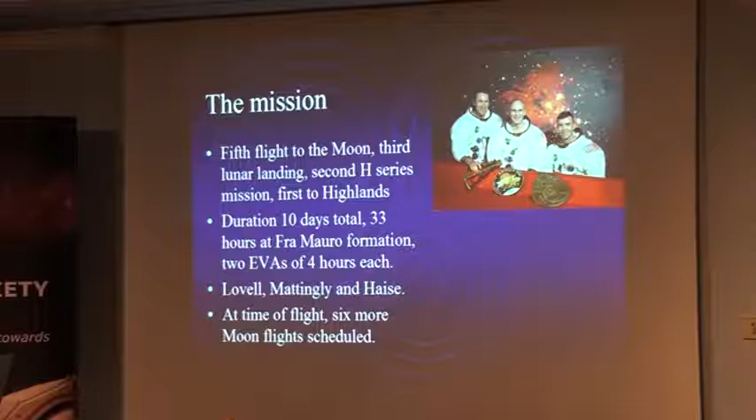The crew was Lovell, Mattingly and Haise, until Mattingly got exposed to rubella - he didn't actually catch it, but he was bumped. At the time of the flight we thought there would be 6 more missions, so this was a progressive step forward. Jack Swigert was moved up from the backup slot to stand in as command module pilot, a very important slot. Nobody ever got to command a mission by being a LEM pilot - you needed to know all of the operations of the whole Apollo system as a command module pilot.

The lunar module pilot really didn't pilot anything, because the commander piloted the lunar module. The lunar module pilot was largely the systems engineer and would do all the instrument readouts so the commander could keep his eyes out front. There was no real head-up display in those days, so readouts would come from the LEM pilot to the right. So the LEM pilot was really a supernumerary - not to demean the position, but this was a very important slot.

So for Jack, this was a tremendous opportunity - straight into a seat that could see him quickly accelerated up to command of a mission, were it to work in his favour. Nobody thought it would, because missions were being cancelled, and so that run-off opportunity was going to be lost.

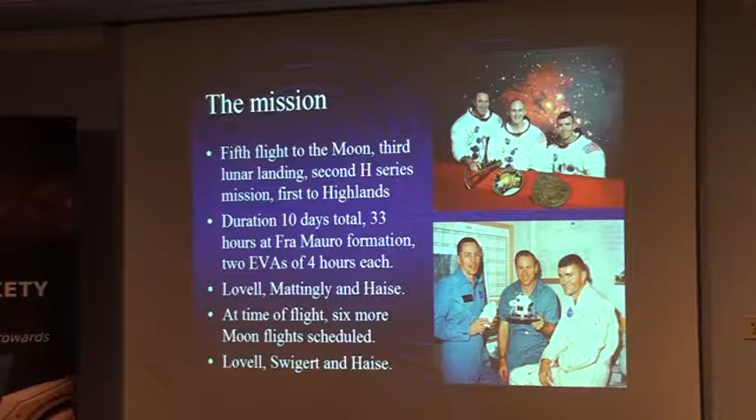This is the thing that never did get recovered - it ended up in the Pacific along with much of Aquarius. That didn't get burned up.

And of course the RTG, the radioisotope thermoelectric generator, and the plutonium-238 dioxide that fueled the ALSEP experiments, were also sadly dumped in the Pacific. The US Navy continues twice a year to do radiation soundings of the location where that cask is, in the depths of the Pacific seafloor, and finds no evidence that there's been any degradation of the cask, as all tests had shown. They're very sensitive to flying nuclear materials off the pad.

You know, rockets have had a history of blowing up. They can disperse materials, so the tests on these casks are very, very intensive, in order to make sure that when you need the power available from a nuclear generator, it's not going to spill its products harmfully - which are incredibly toxic, as you know, in the event of an accident.

Anyway, that nameplate would have been made sometime in April 1970, and it carries Jack Swigert's name there as well. So that's just a nice little token of what never actually did get to the surface.

Pre-flight, okay, we had problems. As I indicated earlier, I'm not going to walk you through every last little detail of the flight - you know the flight very well - but we will visit certain aspects in order, I hope, to correct certain misnomers that come either through the film or through other books that have been written, which generally tend to pick off the high points and miss a lot of the in-depth material.

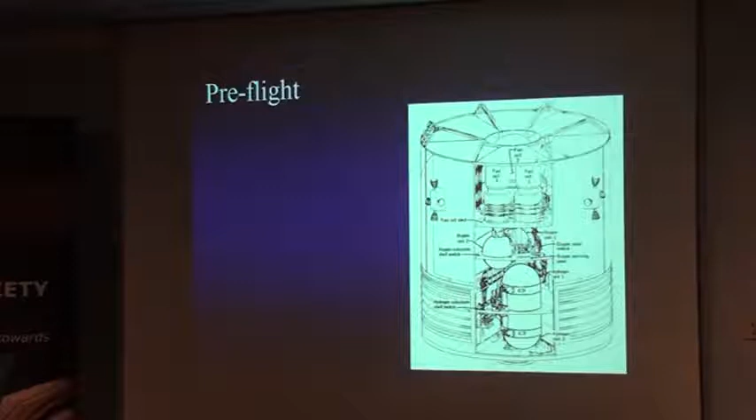So it's a window into what we were working with, thinking how things were done at that time. This is the configuration of the service module, and the major problems we would have would come from the oxygen tanks that are in there - number 2 on the outer position, number 1 internally.

This oxygen tank, number 2, the one that, as you know, cracked - no, it did not explode. Yes, I know the picture on the front of the book, but that's the publicity department at Haynes responsible for that. It did not explode - it cracked and vented the products massively, and cracked the inner tank, number 1 tank, as well. We'll look in more detail at that later. But that's one of those things that really doesn't stand up when you look at the data.

And this tank, like a lot of this hardware, there's been a fast track to get stuff into contract. If you get the chance, get access to the next issue of History Today, a monthly magazine - I've got an article in the issue out later this month, looking at the struggles within NASA to come to terms with a whole new level of engineering that was required in that program.

I refer you to that, where so many of the old guard were moved out in 1963-64 because the Apollo program simply was not happening. We would never have been on the moon in the 1960s had that initial cadre of scientists and engineers persisted and been retained in NASA throughout.

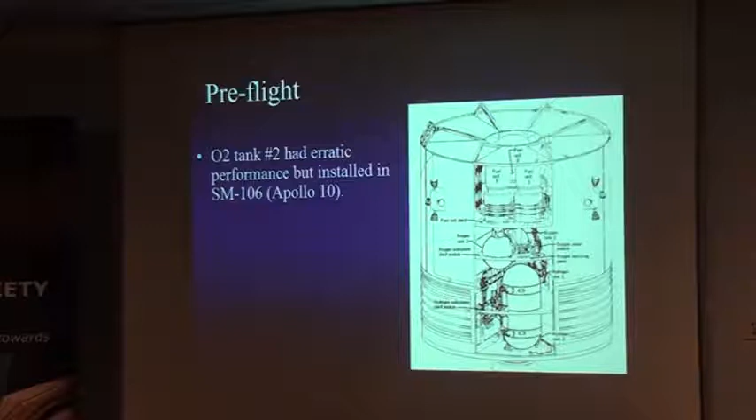The problem was that a lot of this stuff was getting old, was being moved around, and there was an accident that occurred to tank number 2, and still it was used—it was signed off. Waivers were signed in order to get this tank flying, because they didn't want to go back and start up a production contract with Beech Aircraft, who were building the tank for North American Aviation, because that would have been very, very expensive. Yes, we had lots of money in the Apollo program, but not that much, and the budget was going down from about '68, '69.

It was originally installed in Service Module 106, which would have been flown on Apollo 10. That was taken out because at a new level we were learning on the job, as it were, and as you found there were things—oh my God, we didn't put so-and-so in those designs. They really should have them to be safe on the mission. Okay, pull them, upgrade, put them back in, which meant you put them back into another spacecraft that was further down the production pike, so you could slot it in without having to literally strip out a completed vehicle. So this is the way it was handled.

This is not production line stuff. These are Swiss watches, built by individual craftsmen, and their individual names were left on these components in a register to know who had built them by hand. So that was the nature of the business at this time. And it eventually found its way into Service Module 109 for Apollo 13.

Now, one of the big problems was that the test equipment at the Kennedy Space Center, what we call the GSE, the ground support equipment, was wired up—or was upgraded to 65 volts. The spacecraft was wired to handle 28 volts. Suddenly, in 1965, the upgrade to 65 volts was given to the manufacturer, Beech Aircraft, and they never activated that order. They acknowledged they received it, but somewhere in their internal communication, all of the switches for all of the Apollo tanks were made for the much lower voltage.

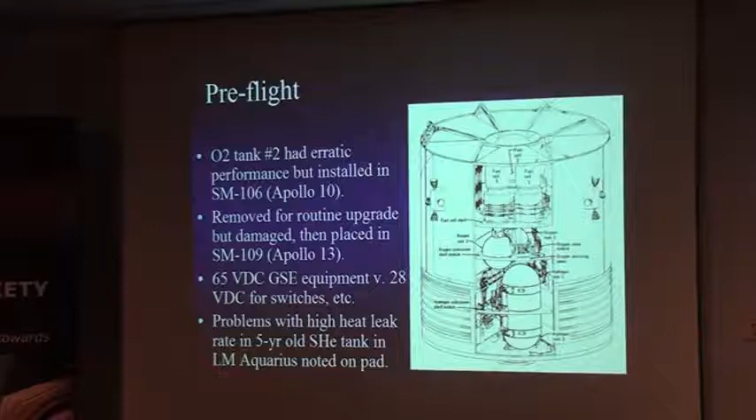That was a lot of the problem. We were running in the face of all of these potential disasters right the way through the whole of the Apollo program. But one of the key factors was that there was so much redundancy built in, and so many rescue contingency plans - that's something we must emphasize as we go through.

So these are the fuel cells on the top shelf. Here are the oxygen tanks, and the hydrogen tank there for mixing in the fuel cells to produce electrical energy - that's how we got electrical energy.

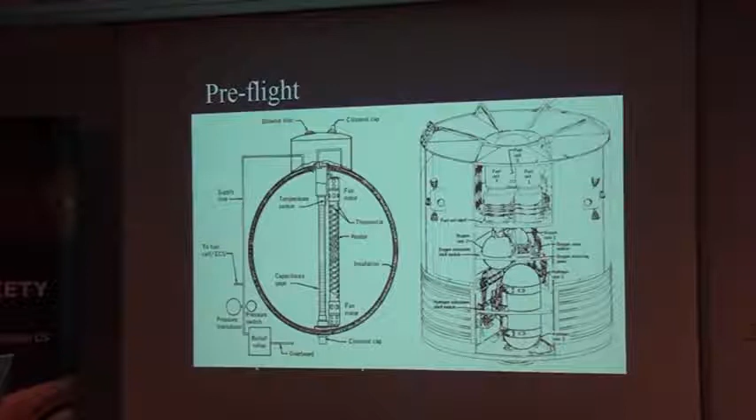But this was the problem: as you deplete the tank and get down low, you want to keep the pressure up by turning more of this slush into a gas, which keeps the pressure and forces it out. It's an expulsion process that does not require a pressurizing diaphragm to be squeezed to push it out, but rather depends on that subtle balance between gas and liquid in the two fluid phases. So basically that's the sensitivity - it's a pretty sensitive balance in the spacecraft to achieve that.

All these drawings are in the book and explained in a walkthrough, but this is just to show the huge complexity of the ground support equipment interfaces, the movement of the oxygen into the environmental control system, and the fuel cell valve module, which then takes the oxygen.

The hydrogen side of the feed is not shown here, but this provides the balance between the oxygen that's needed by the environmental control system and the oxygen needed for the fuel cells to produce electrical power. There's a valve demand system which allows you to regulate the flow and the amount going through the various systems.

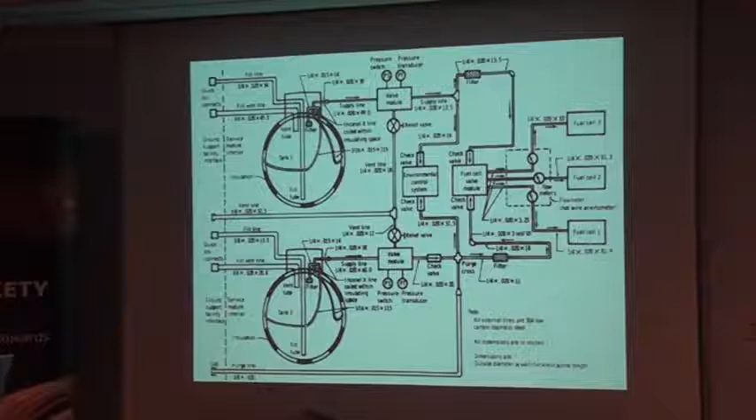Ascent problems - those are the problems we had before the flight. The supercritical helium was known to be rising in temperature, and it would pressurize to the point where it would rupture the blowout disk on the supercritical helium tank. But it would be on the moon and have used the descent propulsion system before the line reached the point where the tank would blow.

So we were launching with a tank that was in fact doing something it should not, but extrapolating forward, plotting out how the temperature would turn the supercritical helium to a liquid and overpressurize the tank, and then waste it through the blowout disk, which would make it impossible to use the descent propulsion system. That was just one of the normal things in Apollo - that's how you balanced and kept things going.

So this was a whole new way of flying missions compared to even Mercury and Gemini. A lot of that overriding confidence spilled into the shuttle, because the new management structures, which were turning their back on the old ways, were already in place during the execution of Apollo missions and the development of follow-on systems such as the shuttle. Remember, the shuttle was paid up and signed for 3 years before we stopped flying to the moon - it dates right back to '69, a year before Apollo 13, when the shuttle became the formal approved program by the White House.

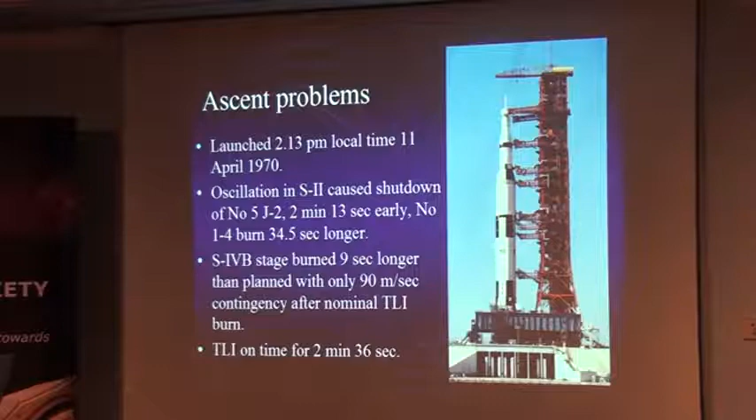TLI on time for 2 minutes 36 seconds.

This is the kind of trajectory—a chart I've used from the operational trajectory manual of Apollo 12. It shows that launching to the moon on a free return trajectory would bring you back like so, and once you get to the point where you can extract the lunar module, you have a backup propulsion system in the engine meant to land you there—a secondary to the primary Apollo main engine that can get you back onto a free return, because the sites we wanted to reach could only be achieved on what we call the non-free return.

A non-free return throws you around the moon and brings you out like this, and you'll spend a very long time before you get back, and you won't be in a talkable condition by the time the spacecraft spirals down to Earth—so you're going to lose the mission if you don't handle it right.

But this is part of the redundancy that was built in. You launched onto a free return, but then had to use the spacecraft's engine, after it extracted the lunar module, to get onto this non-free return path, which had a lot of redundancy built in terms of the actual options you had.

We had abort lines planned all the way through—plans for aborting at each 5 or 6 hour segment. It was balancing all of those with the situation we had at 55 hours 55 minutes, the crisis in Apollo 13. That was the real bugaboo, really, that challenged everybody to make the right decisions.

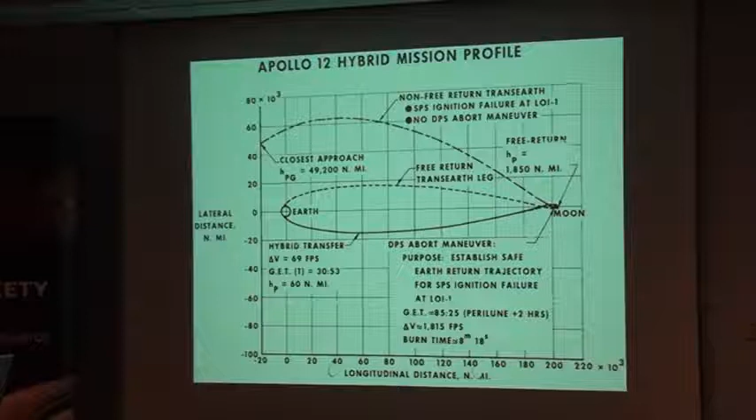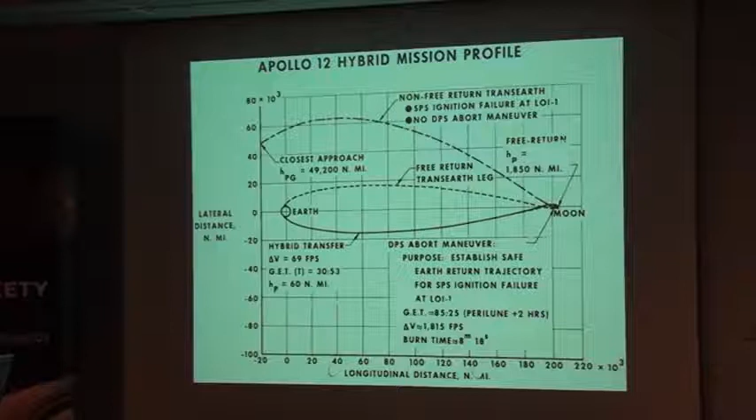It was not 'my God, what do we do?' Nobody said that. There were so many options—which do we choose? They'd rehearsed so much, and more about how, in fact, these aborts had been built into the very engineering of the spacecraft itself. We'll talk about that a little later.

So the connection—this is the axial orientation of the forward-facing seats of the command module, docking, of course with no people in there, with the ascent stage of the lunar module. Once you've connected like so, the extraction took place, and then the standard movement pioneered by Apollo 12 takes you from a free return to a non-free return.

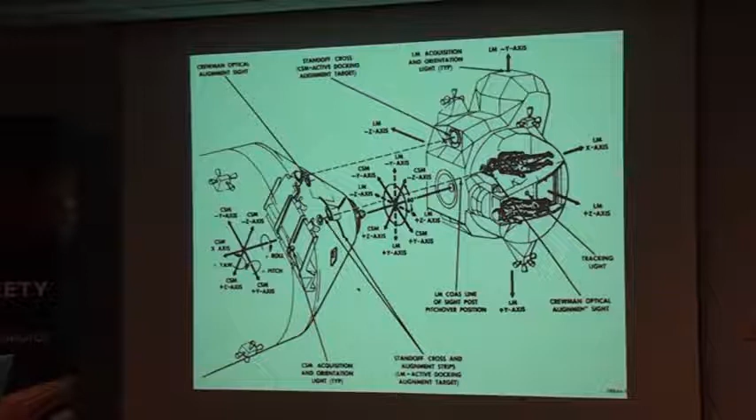This means you've got to fire your engine, else you're not going to come back to Earth—you're going to go spinning off way around to a very different place in the solar system. A long mission, but longer than the consumables could support life for, definitely.

The loss of O2 tank 2 - moving forward, I'm not going to go through all the details of the flight. But looking back at this chart once again, just for orientation: oxygen tank 2 is on the outside, tank 1 on the inside, and the 2 hydrogen tanks.

It looks as though it's tank 1, tank 2, which are spherical tanks. All of the data, as you might imagine, is in the book. These are sleeves which give it the appearance of an elliptical tank, or a cylinder with hemispherical end domes. In fact, they are completely spherical tanks, like the oxygen tanks you see there.

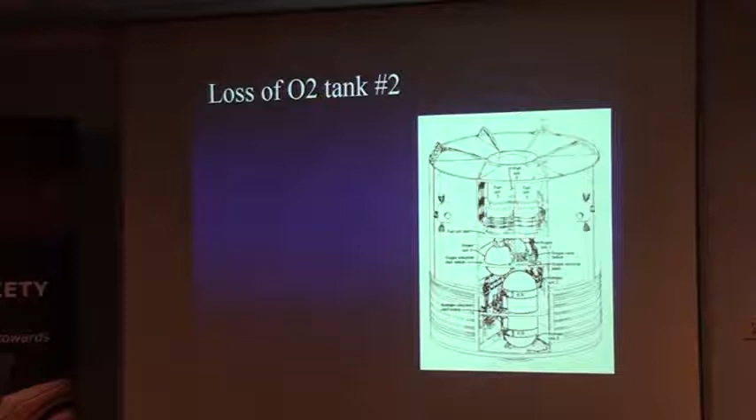So all of the gubbins connecting it all up is controlled via the systems in the command module. The loss of tank 2 occurred - that's tank 2 there. This is a view showing inside, part of the closeout pictures, used in the review board analysis of what went on.

Just to show you the general structure, that bay's taller than a human being, so it's quite a tall structure. This is looking from that side on, and this is tank 2 here.

A lot of material, and it's a very cramped, tight space. You can put your hand round the back of these tanks, but you can very easily get it jammed behind there. There's a lot of very delicate stuff around the back in terms of pipes and tubing. There's not a lot of spare volume, so any pressurization of these bays will build up sufficient pressure to whack that door straight off.

And that panel which covered there was configured so you could service the shelves, as they're called, in the bays - the 2 shelves - and then it was bolted on. So that was that. These are the fuel cells right at the top.

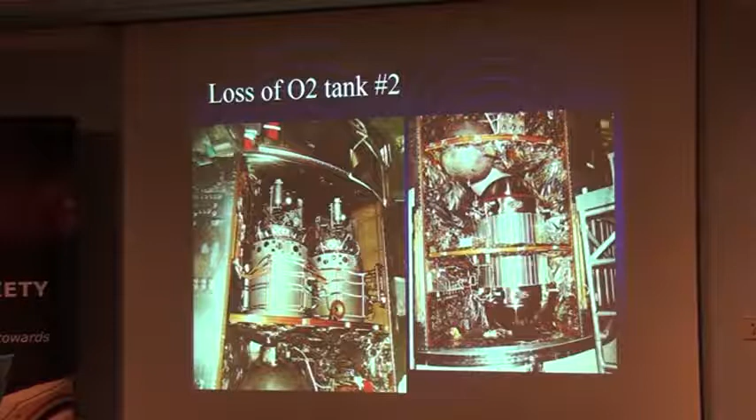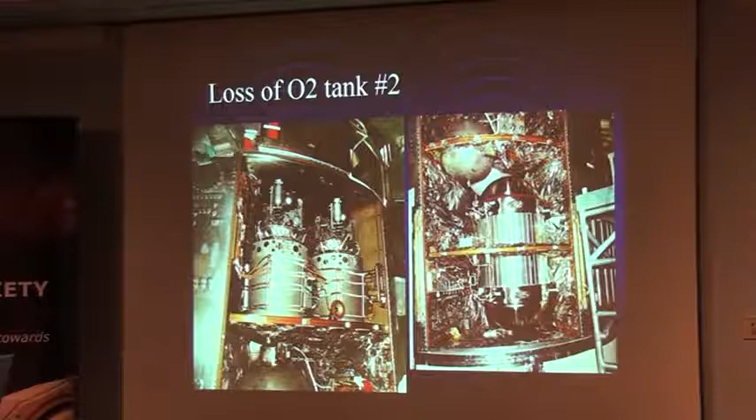Across the top are the radiators for the electrical production system, so the heat taken away by the water glycol solution is removing heat from the mechanical operation of the fuel cells themselves. They're producing a lot of heat, and that's taken away and radiated to space by the radiators there. Big radiator panels on the side of the spacecraft were for removing heat from elsewhere.

During this time, over in the mission evaluation room, this material would usually come through about half an hour to an hour after. So all of this stuff was feeding across and being carried over. There was another room, pretty empty during most missions, room 210, up the hall and along the corridor. But the MER room was slightly askew to the MOCR, the Mission Operations Control Room, and there was a data transfer path from the MOCR into the MER.

And the MER was the interesting place to be. They were mad as hatters in there - it was chaos, bordering on anarchy, because there was such a massive build-up of brain power in that room that I swear it wasn't coffee cup steam, it was coming out their ears during this mission.

There was tremendous excitement building all the way through, and it's difficult unless you were there, unless you imagine yourself into situations of great danger to human life. But you know you can solve this, and it's an extraordinarily fascinating and acceptable challenge. You love it because it challenges you to reach beyond your grasp - Browning said that, and that's what it was all about.

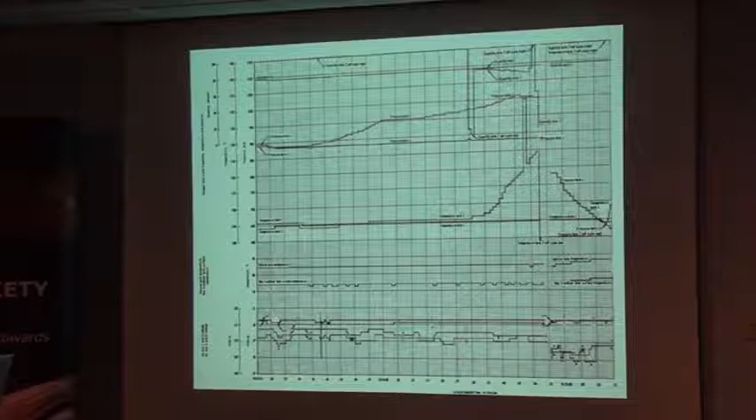The brightness of the reflectance of some of the particles that were venting was greater than the brightness factor of the stars that were crucial for alignment, so you had to go to backup systems for that. But these were the traces as they appeared on the displays initially, in the MER and room 210.

Now this is a room which I always used to love to go to. This is the SPAN — now this is not the span that is the analysis section, but this is the solar particle alert network. And one of the things that was very interesting, and I found particularly fascinating to keep an eye on, is the fact that...

...we thought, oh my God, if we're going to get into the lunar module to use this as a lifeboat and use its systems and shut down the whole of Odyssey, then what you're going to have is the crew in a very, very light-skinned vehicle, and the potential for radiation harm from any of the solar bursts or flares. Aquarius had very thin walls, and this was the room where all of that information from those standoff Pioneer series spacecraft came in, in order to get measurements directly of the energetic particles coming from the sun, and that was an important part.

There was a very intense concern that it could be a very serious health hazard. Radiation has come up recently.

I meant to put a chart on this and I haven't—it's in the current issue of Spaceflight, where I'm trying to lay another of these myths, about going through the radiation belts. They didn't fly through the radiation belts in Apollo. They flew up over, because the moon is not in the ecliptic, it's angled up. So to get to the moon, you fly over and you're very rapidly out.

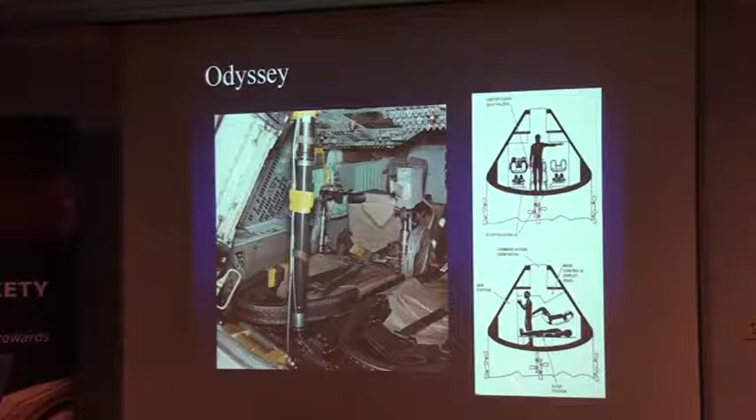Getting in, when you look in an Apollo Command Module, it looks as though the floor is just under there, but there's a tremendous space where you can float and get underneath, so you're suspended quite high up against the control and display panels. All down the left-hand side is the environmental control system, and beyond that, underneath the tunnel area to the far wall, is the guidance and navigation station, with the service module underneath, just to remind on the configuration. That's looking across.

This is another of the closeout pictures, which shows the entry hatch, oodles of space underneath, and the infinitely variable articulation of the seats. Because the maximum G loads are about 4.5 to 7 G, you did not need the form-fitting moulded couches that were needed for the Mercury ballistic shots, and were retained for the orbital shots, and are also used in Soyuz, where there's a very great need for that, largely on landing as well.

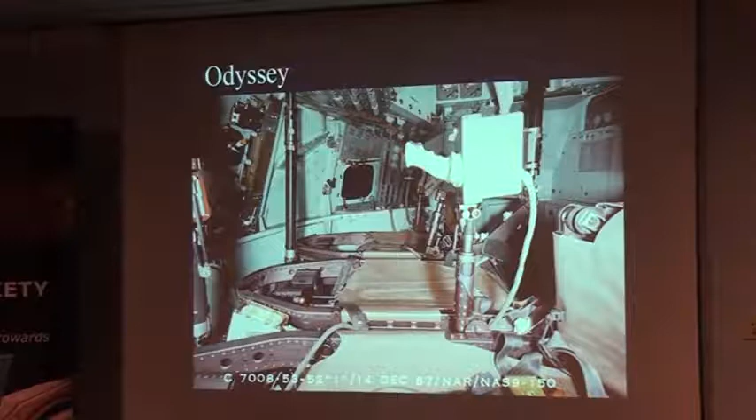But this area became the freezer. It became, because the temperatures were going down so low, the sleep area, which was not particularly effective. The service module itself, in terms of the propulsion system - these are the sectors which contain the 4 propellant

tanks inside there for the service propulsion system. The engine intrudes up to a position about there, and the center section contains the helium pressurization. There's the fuel cells there. This sector, 1 of the separate 6 pie-shaped sectors, would be used in the J-series missions for the scientific instrument module, the SIM Bay, for all of the scanning of the lunar surface from instruments and cameras.

But the concern was we could not use the service propulsion system, not only because it's often said we didn't know if it was damaged. It wasn't that reason at all.

The electrical power - this is another way you look at options. If we'd powered up the spacecraft, you'd have been powering up to 45 to 60 amp hours in order to be able to fire that engine, because it required that amount of electrical power to bring all the circuits on. And it had a lot of electrical redundancy in it, so you needed a lot of systems ganged up with a guidance platform as well.

But the real reason was just to contain as much of the electrical power, because any time anything was powered up in the command module, it came from the lunar module. It did not come from the command module batteries after a certain point - very early on, the most frightening point was when they had to switch on one of the 3 command module batteries, draining away, which only has about 40 amp hours on it, and there are only 3 of those to last the 2 hours down into splashdown. And as tank 1 was draining away, they were running out of options, and it normally takes several

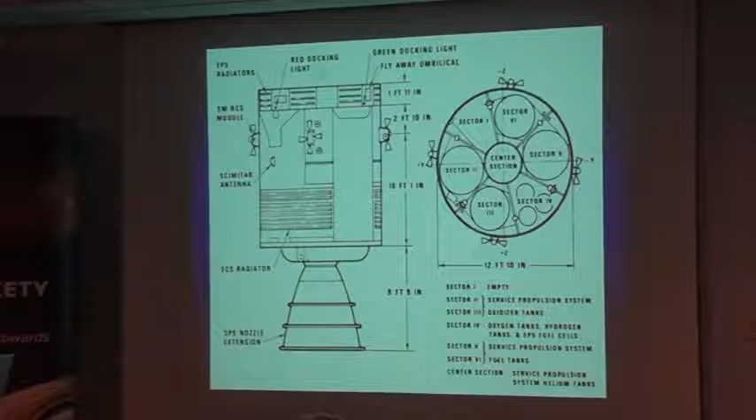hours to power up the lunar module. They did it in very fast time, using workaround procedures that had been developed in the MER on a request from Room 210, that would be one of the major areas of focus initially - get down the power usage, and we'll look at how that was important in just a moment.

So this is the service propulsion system there. It would simply have taken too much power. There was also the consideration it could have been damaged, and a damaged engine bell can play haywire with your velocity vectors, and that's absolutely crucial, particularly when you're trying to get back onto a free return course.

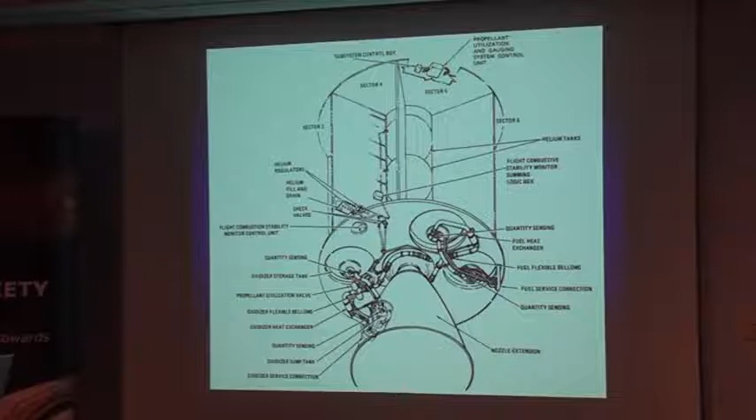So here we were on a non-free return course. Command and service modules are essentially dead. We've got the lunar module occupied now as a lifeboat with its thin walls, and the crew are exposed to any particle alert network concerns that might arise, and only the propulsion systems available on that, because that had about half the electrical power required, simply because there were only 6 400 amp hour batteries, 4 in the descent stage, 2 in the ascent stage, and so it was very quickly becoming a power balance budget, with knock-on consequences for all the other consumables as well, as we'll look at in just a moment.

All these contingency plots were in the spacecraft and in the flight data file, the FDF — volumes of books on the systems and the various. Most of the panels had a lot of words and numbers, all the verbs and nouns for operating the Apollo guidance computer, written on the boards and shelves and the thin wall cupboard doors, if you will, of the container section.

So there was a lot of reference to remind the crew what was required at various times, and this information was carried aboard, because if you lost communication with Earth, you'd need to generate this information directly on board and fly the vehicle back. Draper Labs, who did most of the G&N stuff, prided themselves on being able to cheat the system and get greater, more accurate navigation than Houston could provide, simply by the crew doing celestial navigation using the tools on board with the G&N system.

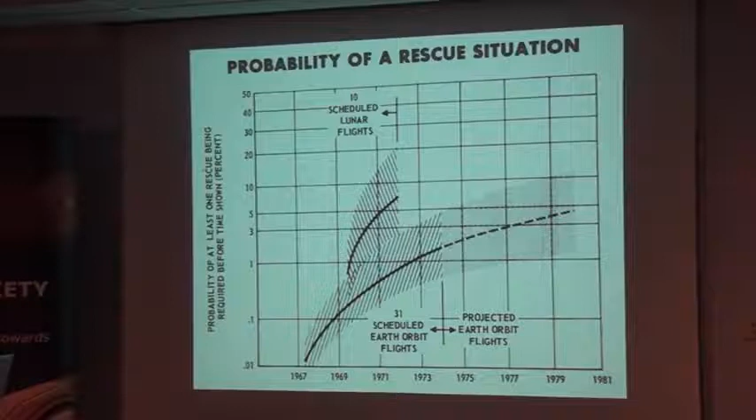Okay, but that's just to show you the kind of thinking at the time, and these were internal planning documents where, yes, these were expected. I'm making a joke of it, but this is pretty standard stuff.

Aquarius, of course, familiar to all of you I think — ascent stage, descent stage with propellant tanks for the ascent, and all of the electronics on the rear end of the vehicle, with the propellant tanks, the rendezvous radar, the S-band communications antenna, and a light structure. A lot of very unkind things have been said about the lunar module, that you could kick it with your foot and go straight through.

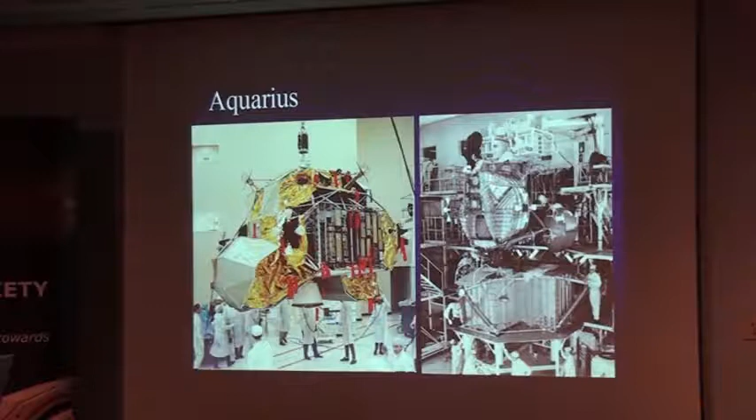That's another view of the rear. That's the lunar module. Pilots say it behaves like a real sports car when it's devoid of the descent stage, but essentially this was the vehicle with its systems - 4 batteries in the descent stage, 2 in the ascent stage, and this is the configuration. These are VHF antennas on the back there, and that's the structural shell.

There's lots of drawings like this in the book. There's an appendix in the back, one on the command and service modules, one on the lunar module, so it brings that right up.

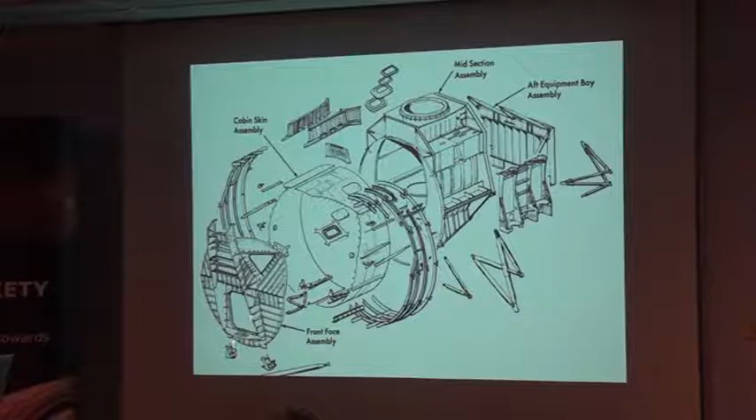This pressure shell in here has two steps. You step down into the circular section - that's the section connected with the command module, so you float down there, and immediately what is up in the command module is down in the lunar module, because they're docked like so. The ascent engine is in there, so you sashay down into the lunar module, forward to the front face assembly with the hatch and the two triangular windows.

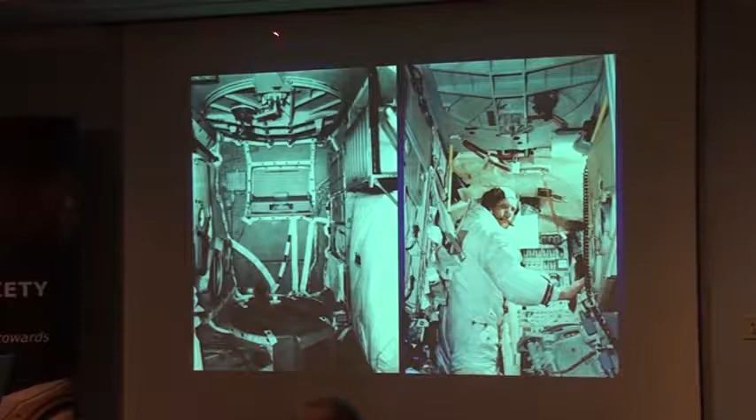This is a picture from Apollo 11, showing Neil Armstrong on the ground, not in flight, to give you a view looking forward from the position that's really sitting on the ascent engine cover, with the hatch at the top, to give you an idea of the space in the lunar module, with all the environmental control stuff on the side. This is looking back from Neil's position, or forward, with the ascent engine cover there, the PLSS - the personal life support system - recharging equipment back here, and the hatch you see there, up into, in the case of Apollo 13, Odyssey.

This is a fisheye lens view which just shows the general layout. What's missing there is the DSKY panel for the lunar module guidance computer, and here you've got the circuit breaker panels either side, and that's the hatch you would hopefully go out to on the lunar surface. Also, 8 balls here, the flight director attitude indicators slaved in with the guidance and navigation system.

So this became the engine room for Apollo 13, where it should have been the front porch of the taxi going down to the lunar surface. So, a very important job to play.

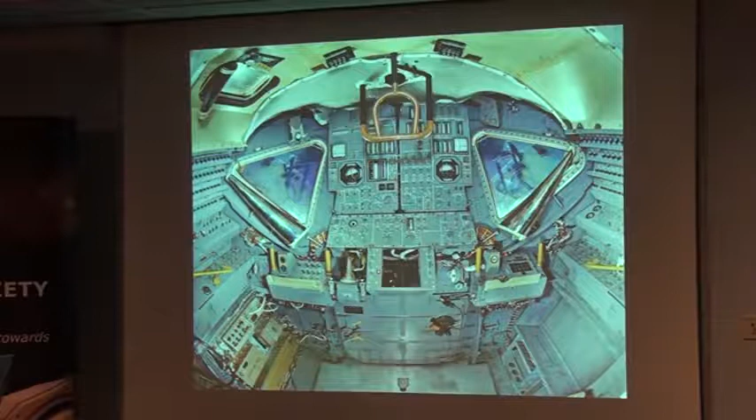LEM propulsion, of course - the ascent propulsion system was unavailable because the lunar module had most of the consumables. Two-thirds of the consumables were in the descent stage section, largely because it was only meant to be used during ascent and rendezvous. There was proportionately greater consumables in the ascent stage than in the command module for the Apollo CSM, because potentially you could be stranded in orbit and wait a day or so before the command and service module came down to rescue you, if that was possible.

Once you were barreling down the re-entry corridor into Earth, you were going to come into Earth's atmosphere anyway, so you had no option. You could just have a couple of hours of life support in the command module after you'd separated the service module.

But it's important to point out there was a point, which I'll mention shortly, where we went on to LEM ascent stage consumables, which was a great relief in case something terrible happened again in the descent stage, because we had to jettison that. There was a point in the mission where we breathed a further sigh of relief on the way back, where we could survive the crew on just the ascent stage alone.

The DPS provides essentially 44.4 kilonewtons of thrust, nominally 10,000 pounds, throttleable between 11 and 65%, or between 92 and 100% - you didn't want to go between those two, very unstable, it would shake itself to pieces and the engine would become very aggressive indeed. So there were those thrust bands, and we had a proportionality option with regard to the thrust that was available.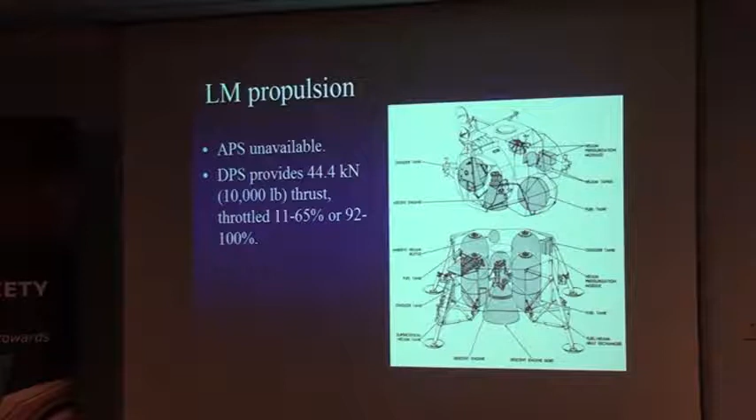So using the dips early on was good to get back onto a free return trajectory. That used the ambient, and then when you fired again to speed up the burn two hours after passing around the moon, that used a little more of the supercritical helium, but still didn't use enough to completely vent it out, and we'll see the consequences of that.

The delta V available in the lunar module is reduced because of the greater mass. In big numbers, about two-thirds of the mass of the whole docked configuration was in the command and service modules. And remember, we'd only used the service propulsion system engine once, just to go off the free return onto a non-free return.

Just a few seconds burn, just to make sure it would work. You always want to do one of those mid-course corrections with the SPS to verify you'd blipped it on and off fine, everything, start up, shut down, any transients understood, so it would be cleared and the MER would look at the trace. Yeah, that's okay flight, we can use that. Okay, that would fit in, that's another tick. Use the SPS for lunar orbit insertion.

There were all these different gates that were occurring. And I wish we'd done more of this talking to the public about what was happening, because so much was going on that was intensely fascinating.

Rocket science really is common sense, and I mean that in a very serious way. We need to feed this stuff into our education more, and I know the BIS is doing that with its education programs as well. But there's a very strong need to give practical applications, to run missions, show them how all this worked, to get the kids playing with these things on their computers, and it's great.

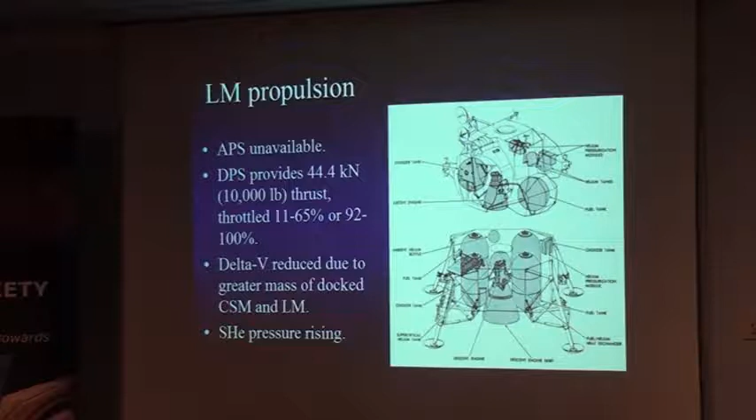Supercritical helium pressure was rising, we've talked about that. Okay, consumables.

Now this is a factor which is quite important. The oxygen was in abundance. We had more than twice as much oxygen as needed. Why? Because on a normal profile, I put this chart up to show that on a normal mission...

...the 33, 35, 40 hours you had the lunar module powered up, you'd have to incorporate this use rate, but it drops because that's when you vent in order to go out for your spacewalks. You dump all of the oxygen that's in the cabin. Well, we didn't on Aquarius, so we just kept that line going, so it would last very, very much longer. And that's the facet.

And in fact there were three, because on Apollo 13 they were going to open the door a third time and throw out unnecessary things in order to take in more rocks from the surface. So there was all of that. This is all part of the geometrical ballet that went on - if you don't need to bring things back, throw it out the door.

Very American way, lighten the load, and then you've got additional margin. What the heck if you don't need it on ascent? It reserves your options for rescue rendezvous if you need to do your bit, if you've been landed in the wrong trajectory for orbiting or rendezvous with the command and service modules.

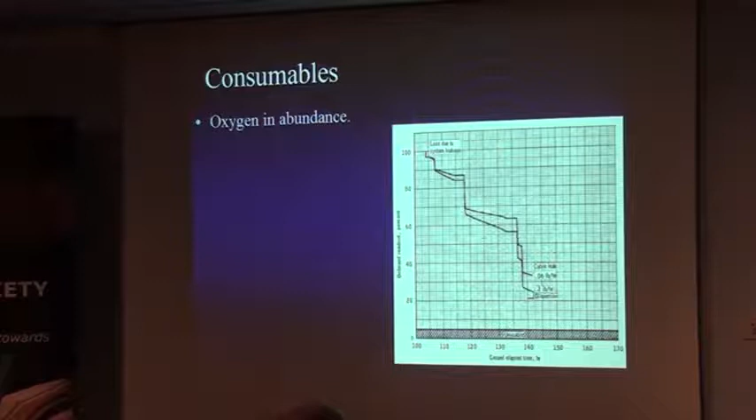So oxygen was fine. Water consumption on coolant demand were proportional to power. This was really, really interesting, and I go into it at nauseating, tiringly boring extents to show exactly how the amount of water available for the coolant to keep the systems running was proportional to the number of systems being turned on to run the mission. So every time we had to do a guidance and navigation task or fire an engine, the power consumption went up, which meant the water demand went up.

So with normalized water consumption, all of a sudden you could have enough water to last the mission, and then whoa, if you kept using it at the rate needed for an engine burn, you'd run out of water. You knew you would, but you'd be back to a very low level again after you'd powered right down. So it was a seesawing - the figures going in and out from the time you knew you wanted to get them back, round about 142 GET, ground elapsed time.

So this was beautiful stuff. This was lovely. You know, you've heard people say, I had a good war, I miss it. Well, in some ways we say, I had a good disaster there.

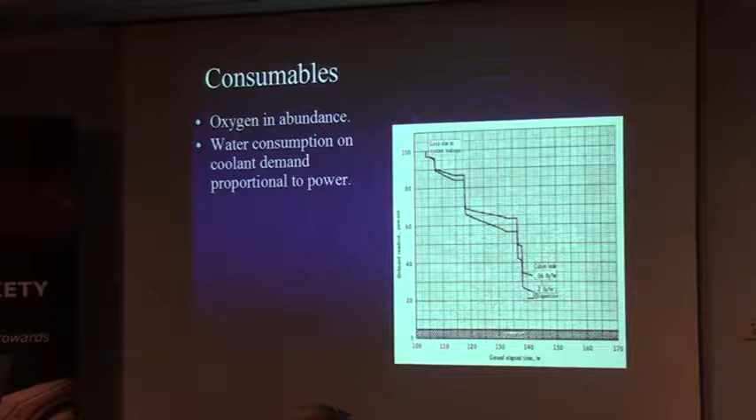I wish it had gone on a bit longer. I don't think anybody really felt that, but the challenges were inspirational. They were great, and the things people were suggesting - wow, yes, of course, we can knit with that and do this and that. And to hear this going on was incredible.

Battery life depends on the systems enabled, because there's a finite power. So the power went down. Normally we'd be running the LEM at 45 amp hours all the way down to 12 amp hours, and by the conventional equation, which I won't work you through now, you can work out that that's 336 watts for a 28 volt direct current circuit. That's like 3 big light bulbs running everything aboard the spacecraft to get the crew back.

At the same time, you were heating up the electronics you turned on, which was foreclosing the life on the battery, using more water, so everything went to hell on a handcart while you were in that power down, and you had to get back quick. So you didn't want to try anything clever or anything that was not absolutely necessary, because you were buying time, and then you had to give it back by going even deeper in the power down, which meant conditions were evolving in the spacecraft where temperatures were getting pretty close to freezing, with horrible dampness and moisture.

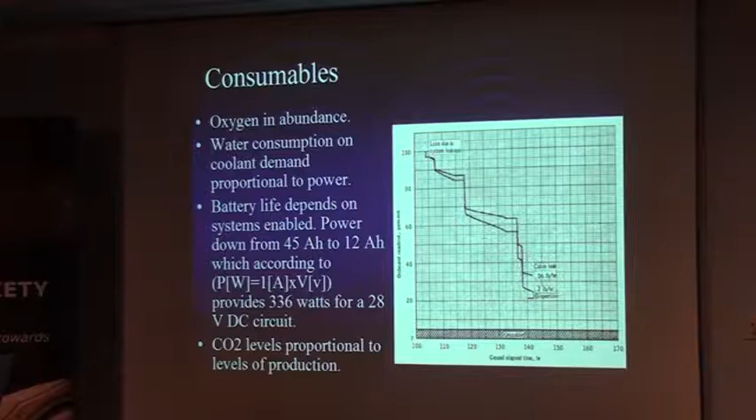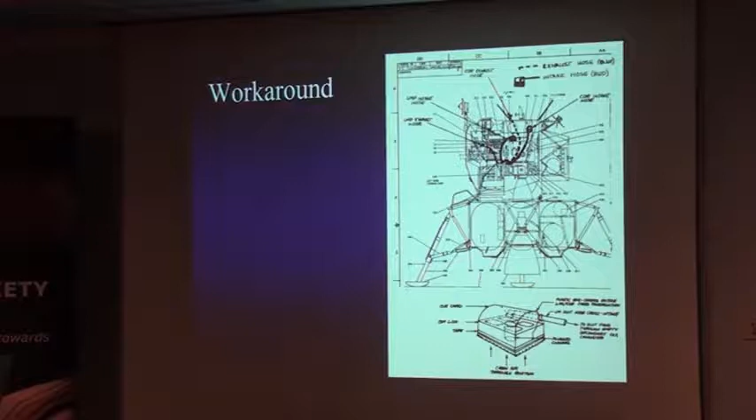Workarounds - this is one of the charts, again it's produced in the book, which shows the workaround on the intake hoses for manoeuvring the boxes for the CO2 scrubbers, bootstrap engineering for this. This was something completely new, out of nowhere, in terms of what are we going to do, because the boxes from the command module don't fit in the lunar module. This was one of the big boo-boos of the whole program, the fact that we didn't have common equipment interfaces across these two very different vehicles built by very different contractors - no commonality spec on that level.

And so to get the mailbox, as it was called, worked up, which we'll come to in a second - this was part of the procedures where there were numerous contractors, and I delve a little bit into people being brought out of their bathtubs dripping wet, people getting police escorts, people driving through blizzards of snow, arriving to find factory car lots at 2 a.m. absolutely crammed full, snow yay-high deep, because everybody was flocking in. And right across America, when news broke about this, people just got in their cars and went in, whether they were needed or not, because they felt they needed to be there.

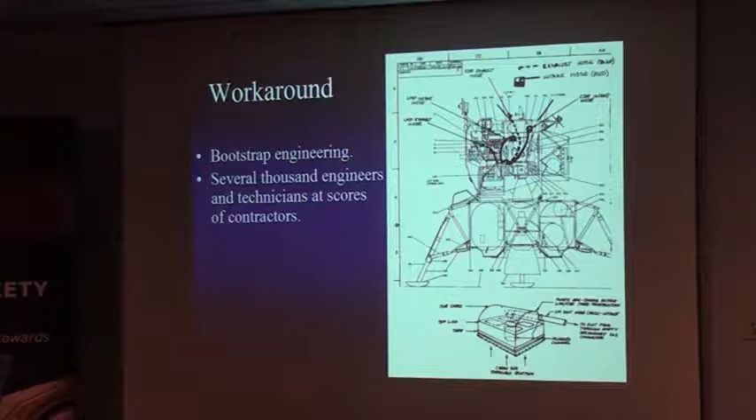If they could only make tea for the guys that were working around the clock, they'd do it at the contractor bases - Hamilton Standard, Eagle-Picher, Avco, all of these different places. And the spirit that went out was just phenomenal.

There were various emergency phone lines installed to feed conference calls that were never thought to be necessary, linking the MER guys with the Room 210 guys, because Room 210 wanted to know if they were making sense of the data, and oh, by the way, can the contractor find out so-and-so? So it was real-time evaluation all the way through.

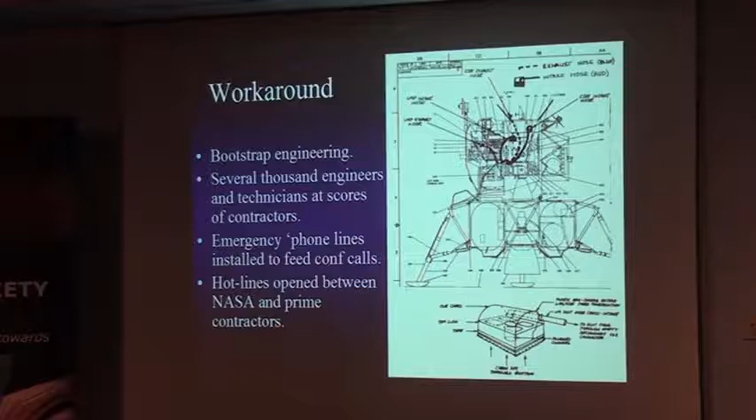A hotline opened between NASA and the prime contractors. NASA management reassured the contractors that they would not have to stump up the cash for any of this. They said, we'll make sure you're okay, bring all your teams on, we'll work it out.

Traditionally a lot of these things had been off their production units for years. So a lot of these companies had not made Apollo-related stuff for years, but they pulled in and they immediately responded, because they were very proud. It was on all the ads - if you had any component on Apollo, that was on your advert. It just propelled you into the exalted heights, because you provided stuff that the moon astronauts were relying on. So there was this genuine feeling all the way through.

Simulators were worked 24/7 during the crisis, trying new operational procedures. There never is enough simulator time. There are never enough simulators. There's too much to do in those things, and there are too many variables to work all the time.

At this time, there was so much that was needed for switch positions, because the switch configurations had to be restructured in a completely unique way. So these areas were new as well - not the practices of the operations, but the way in which these things were done.

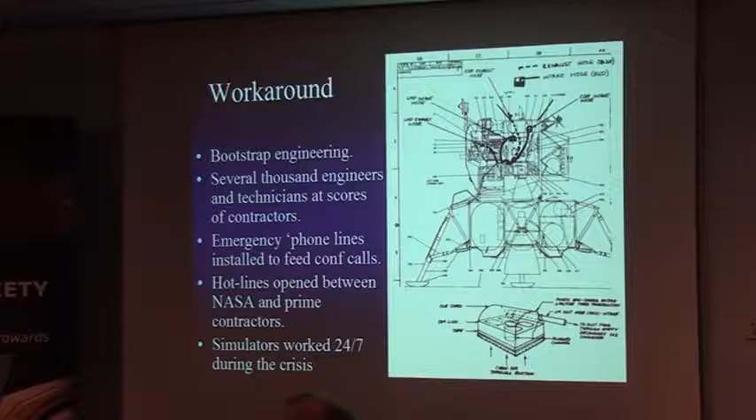And reading through all of the lists that had to be voiced up to the crew - there were no teleprinters, there was no uplinking. Everything had to be voiced over and copied down, and several times they had to repeat it because the crew were getting a bit flaky on putting everything down exactly. You only want to get one number wrong and you've blown the whole circus. So this was critical to get right as well.

This is one of those charts - again, it is in the book, which shows Hamilton Standard working around the Lunar Module Environmental Control System.

I've got many of these things that were done at the time, worked up and literally done on scraps of paper, handed to test guys - ring Houston, get the test rigs running and breadboard the stuff, put it up in a rig and then work it, then take those positions and find out how the switch configurations in the simulator can match what you're trying to do by manually pushing and shoving things, connecting this, disconnecting that. Does that have to be wired? Can that allow power to go there while we're powering up this? All of those things - it was a nightmare, and it had to happen very, very fast indeed.

The need to make decisions critical to the lives of those crew was absolute all the way.

Revised trajectory events, of course, just to remind you of the way all this flew - 55-55 in the relative position of the spacecraft to the moon. It's nearing the point of equigravisphere here, which is where the spacecraft starts to speed up, and the moon's sphere of gravity or influence is now dominant.

So there was a mid-course correction to get onto a free return by firing the descent engine at 6130, and then around the far side of the moon, instead of being on this non-free return, the crew came back. There was the Pericynthion +2, Pericynthion being the closest pass on the far point, +2 for a Pacific landing at 7928. The adjustment, knowing how the Earth was rotating and where you were going to plop the crew down, that was very important. The Pacific was felt to be really, really important because all the recovery forces were there, and mid-course corrections you see here would be done to fine-tune that.

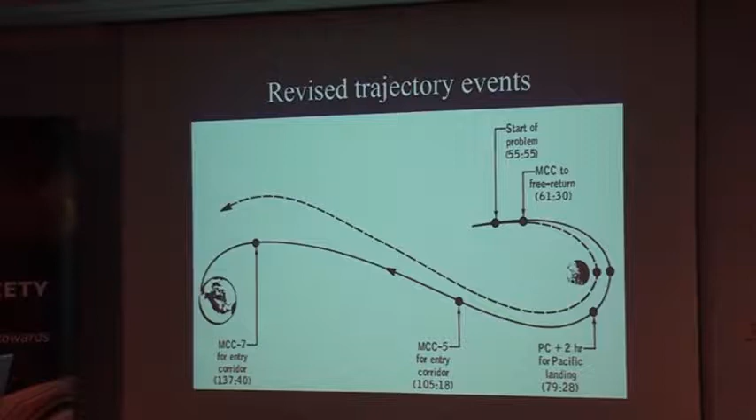So all of these abort pads, as they were called, we'd have at T plus 5 hours, 10, 15, 25, 30, all the way through, and the Met guys would work out what weather systems were going to be there. You'd move the line of longitude in the pad you'd voice up for the propulsion needed to get you back to a longitude outside the weather front moving in. That was normal, all this was going on all the time, and you'll read that in the book as you go forward in the story.

Levels reached 15 before use of the mailbox adapters. You really wouldn't normally go beyond 3, but they stretched it up there, and this was a period of great concern to the medics because of the effect it was having on crew performance, potentially. So what was needed was to take those, because they were insufficient, since the lunar module was only supposed to be manned for 33 to 35 hours.

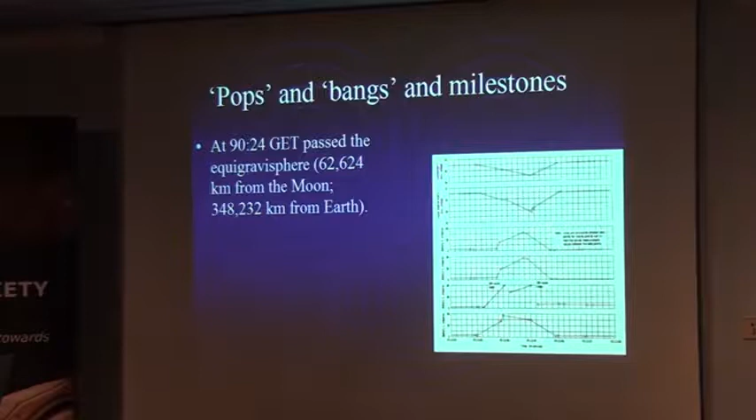Pops and bangs and milestones. At 90 hours 24, past the equigravisphere at those distances - don't worry, all these numbers are in the book - that was a psychological moment where you began to speed up. You were now reduced from about 3,200 kilometers an hour, falling back down almost to the speed of Concorde in flight, from the 36,000 kilometers an hour leaving Earth orbit, right the way down as the Earth tried to pull it back, and then it speeds up. Likewise returning you begin to speed up, and that's a wonderful feeling, I imagine, coming back from the moon. Everybody felt that, and it was voiced: okay guys, you're actually speeding up now.

But at 97 hours, one of the 6 lunar module silver zinc batteries blew up. These are the traces as they came in on mission control, which shows the hiccup. Gas had built up in one of the plates in the silver zinc battery and blown. It was of no great moment, it was still okay, still producing power. But it's another one of those things to hear bangs going off and more stuff venting - not really what you want for a calm Sunday afternoon. That's one of those things that began to get on their nerves and stress them, because what else is going to fail?

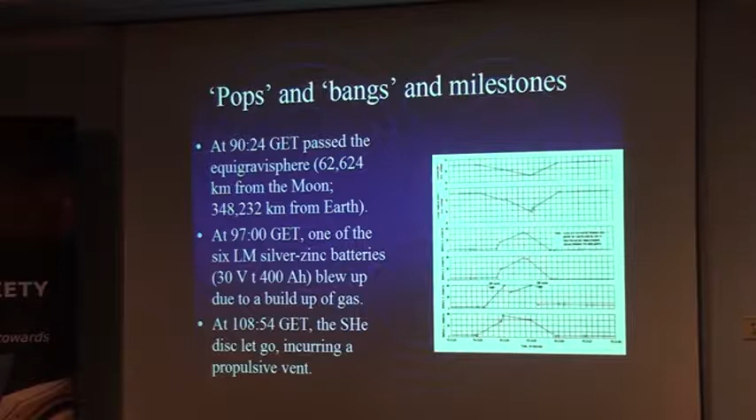Everything was falling apart, it would seem. Then at 108 hours, the supercritical helium disk let go. There was a bang, and the spacecraft started drifting, incurring a propulsive vent. It's supposed to be a non-propulsive vent, a T-vent, so it comes out equally proportional and cancels off at each side. But it didn't—it was propulsive, the burn. So there was this constant wearing down of what was happening and what was not going well.

A matter of survival. It's one of my favourite pictures of Jim Lovell in crisp white flight overalls. Water intake was very low, increasing much later in the flight when so much water had been saved that there was quite a reserve. Weight loss was 6 and a bit kilograms for Lovell—those are the weight losses. And of course Haise contracted a urinary tract infection, as I think you know, and had a really serious problem after he got back.

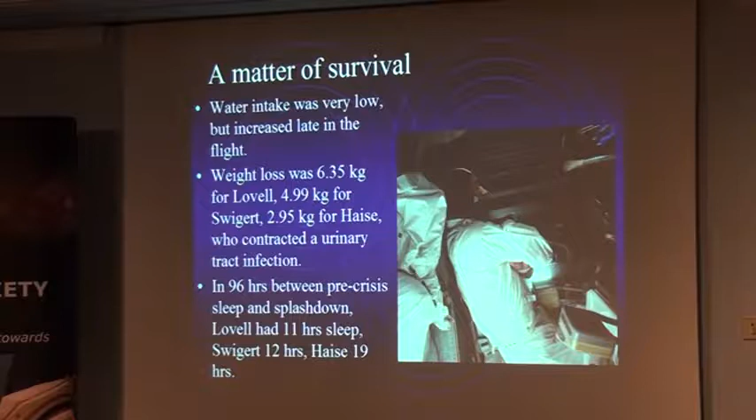In the 96 hours between the pre-crisis sleep and splashdown, Lovell had 11 hours sleep, Swigert 12, and Haise 19 hours. They cosseted Haise because they were worried about him, seriously worried—he was going downhill fast. With this urinary infection, part of the characteristic is you start to hallucinate, and there were slight indications he wasn't holding it all together, but he did. That's a remarkable example of the kind of training, the kind of person you have to be as an astronaut, and that's great.

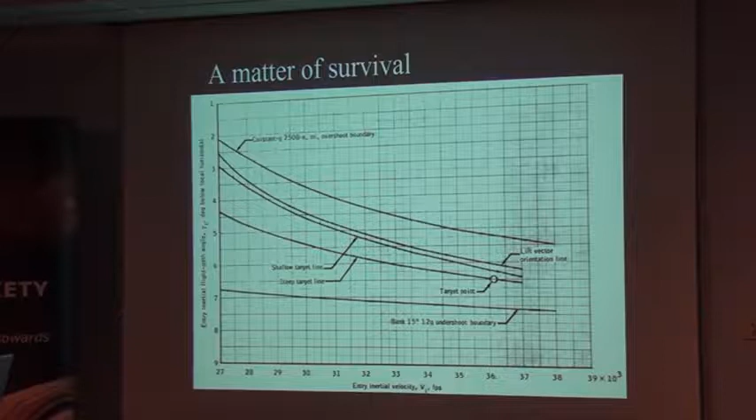This was the thing we had to aim for. With the burst disk and the supercritical helium taking the trajectory off, you need to get the target point. This is entry velocity—in English measures, feet per second. The Americans, you know, they don't do metric. Anyway, 36,000 feet per second, and this is the entry gamma, the flight path entry angle. You need to be within very tight boundaries indeed, and it kept drifting around because of the stuff venting out of the uncontrollable supercritical helium tank, so little tweaks and thrusts had to be put into that.

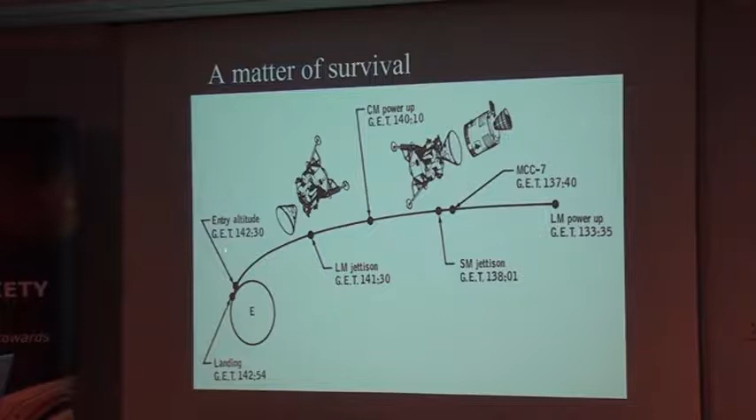And the powering up of the command module—that was arguably the second most critical point, because nobody knew if powering it up from that terrible state it was in would work. Nobody had taken so much testing, and I could talk for hours on the tests done on each of the systems to see if they could be plunged to such low temperatures, brought up, and just work, just like that, as advertised—and they did. Then LEM jettison, entry altitude, and finally the landing. 'Goodbye Aquarius, we thank you,' were the words that came out.

Separation of the service module at 138:01, and the LEM jettison at 141 with that famous phrase, 'Goodbye Aquarius, and we thank you.' The poor LEM was destined to follow the trajectory down, spearing into the Pacific, down into the depths, where its cargo—intended to be placed on the surface of the moon at Fra Mauro—was not placed, but which did a remarkable job.